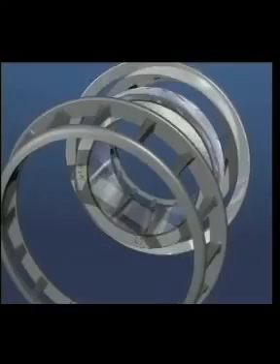This SKF training film is about spherical roller bearings with tapered bore. The spherical roller bearing with tapered bore consists of an inner ring with 2 raceways and 2 rows of spherical rollers in cages, a guide ring and an outer ring with a sphered raceway.

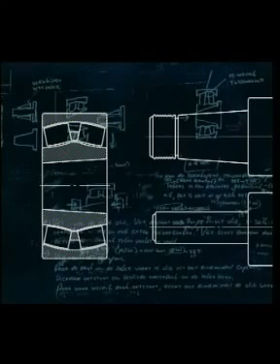This bearing is used where both static and dynamic misalignment capability is required and ease of mounting and dismounting is important. Spherical roller bearings with a tapered bore can be mounted on a shaft in a number of ways. The 2 most common methods are on a cylindrical shaft using an adapter or withdrawal sleeve. This example shows mounting and dismounting the bearing on an adapter sleeve.

These spherical roller bearings are commonly used in applications like conveyor drives, bridges and cranes.

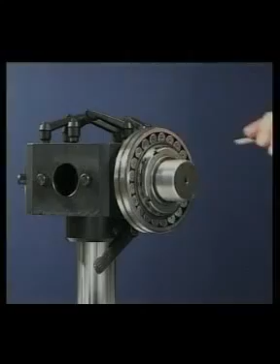To dismount a spherical roller bearing with a tapered bore, the lock washer tab is driven back and the lock nut loosened using a lock nut spanner.

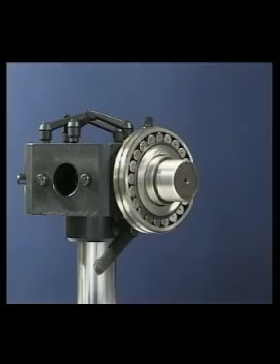This application is designed to remove the bearing with a hydraulic nut. It requires a recessed collar between the bearing and the shaft shoulder.

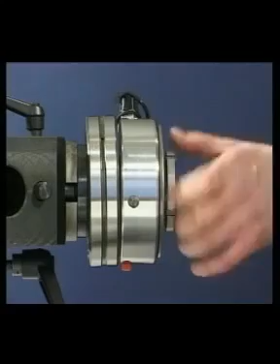After reversing and mounting the hydraulic nut on the adapter sleeve, it's secured to the shaft with a lock nut.

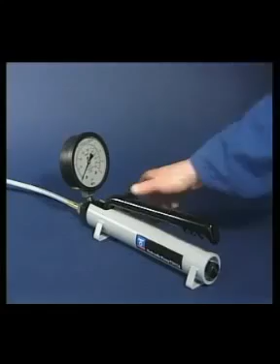By pumping oil into the hydraulic nut, the adapter sleeve will be pushed back and the interference fit will be broken. After removing the hydraulic nut, the bearing can be easily dismounted.

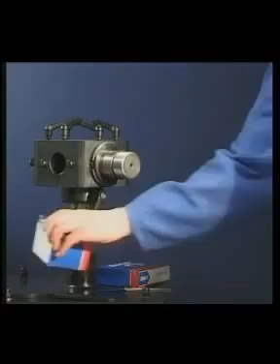For the mounting of the spherical roller bearing with a tapered bore, an adapter sleeve can be used. Use some light oil on the mating surfaces.

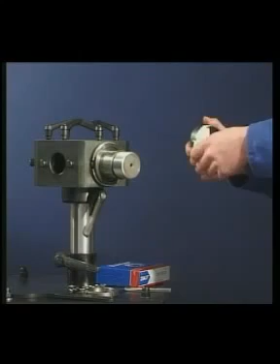There are a number of methods that can be used to mount spherical roller bearings with a tapered bore. One of the most common methods for smaller bearings is the mechanical drive-up, using the adapter sleeve nut.

After positioning the adapter sleeve on the shaft, unwrap the bearing from its protective package and place it on the sleeve.

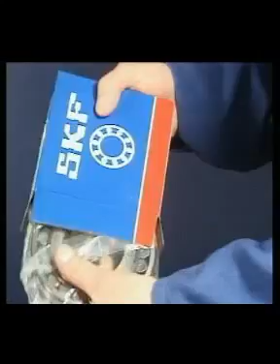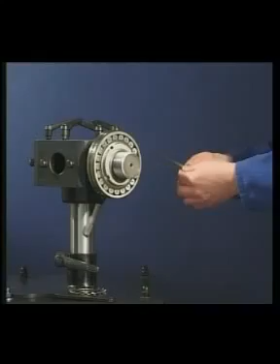Screw on the lock nut. Make an initial internal clearance check using feeler gauges. Make sure that the clearance check is performed in the unloaded zone of the bearing.

By mechanical means, the bearing is driven up the adapter sleeve. By regularly checking the residual clearance with the feeler gauges and making reference to the SKF drive-up tables, the correct drive-up can be achieved.

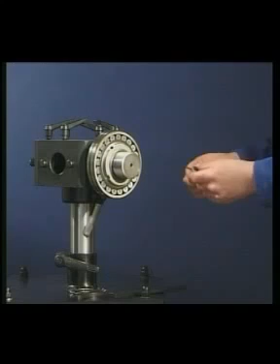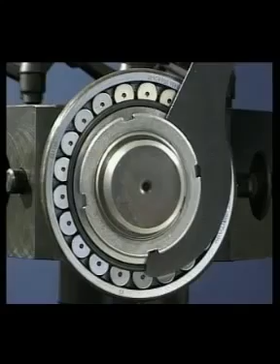After the correct clearance has been obtained, remove the nut.

Fit the lock washer and replace the lock nut. By tightening the nut and securing the lock washer tab, the final mounting of the spherical roller bearing is achieved.

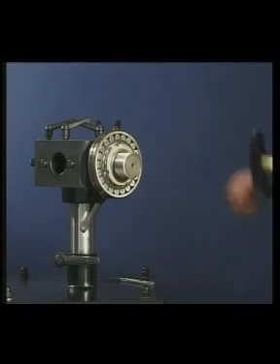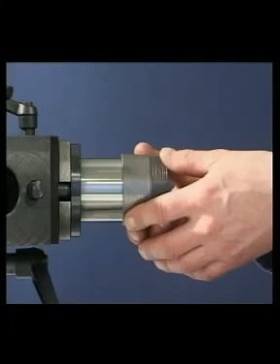A more accurate method for adjusting spherical roller bearings on tapered seatings is the new SKF Drive-up Method, developed by SKF. This method uses a modified hydraulic nut with a dial indicator and a specially calibrated hydraulic oil pressure gauge and pump. It must be used in conjunction with SKF tables.

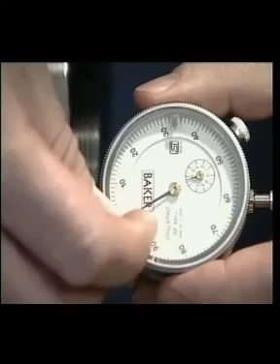The hydraulic nut is pressurized to the initial values as found in the SKF tables. The dial indicator is set to 0, and the bearing is then driven further up the sleeve to the correct distance measured by the dial indicator. At this point, the bearing is correctly mounted.

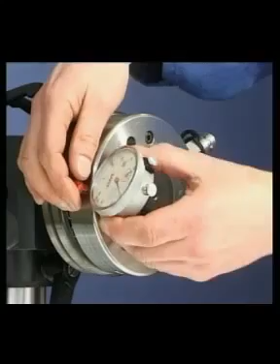Remove the hydraulic nut, fit the lock washer and screw on the lock nut. After tightening the lock nut and securing the lock washer tab, the mounting of the spherical roller bearing with a tapered bore is achieved.

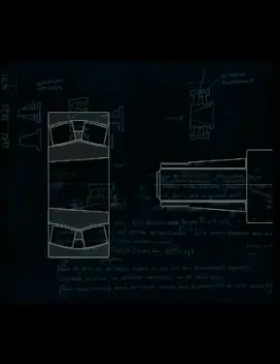The spherical roller bearing with a tapered bore is supplied with a predetermined amount of radial internal clearance. When the bearing is driven up its mating shaft seating, take care not to remove all of the internal clearance by driving it up too far, because this will impair the performance of the bearing and dramatically reduce its life.